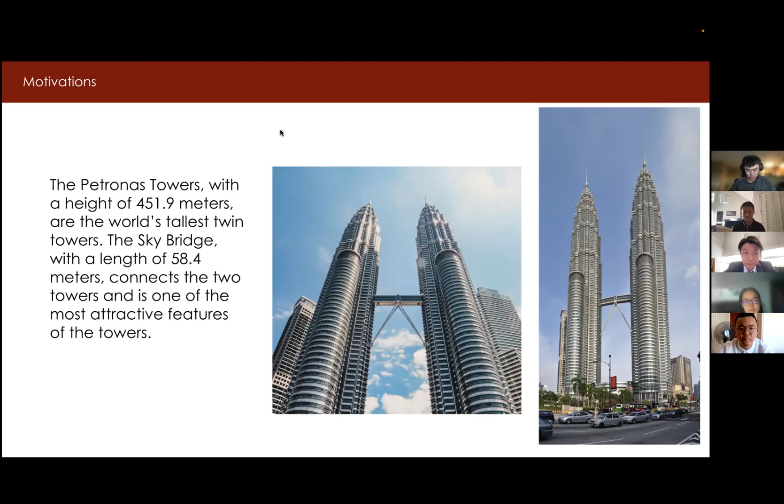Now I'll talk about the objective of our study. The objective of our research is to construct a finite element model to analyze the maximum normalized deformation at different frequencies for the Petronas Twin Towers. We also aim to analyze the building's deformation under pressure with different damping ratios. We use 3 different damping ratios to study the effect of the tower's dampers on the building.

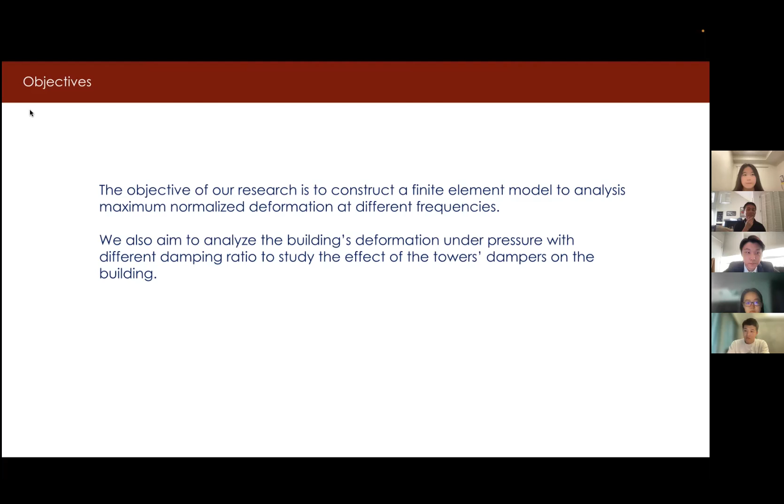Here's more on the background of the building. The Petronas Twin Towers was designed by Cesar Pelli, an Argentine-American architect. The towers were designed to resemble an 8-pointed star that represents unity, harmony, stability, and rationality in Islamic cultures. So this building represents the cultures in Malaysia and has special meaning to Malaysia as a result.

The construction of the Petronas Towers started on March 1st, 1993, and was completed in 1996. They were officially opened on August 31st, 1999, and the 2 towers each have 88 floors. Each tower weighs 300,000 tons, so the total weight is 600,000 tons. The towers were made of high-strength concrete with various strengths up to 80 MPa. The foundation of the towers is a 4.42 meter thick concrete mat, supported on 104 concrete friction piles.

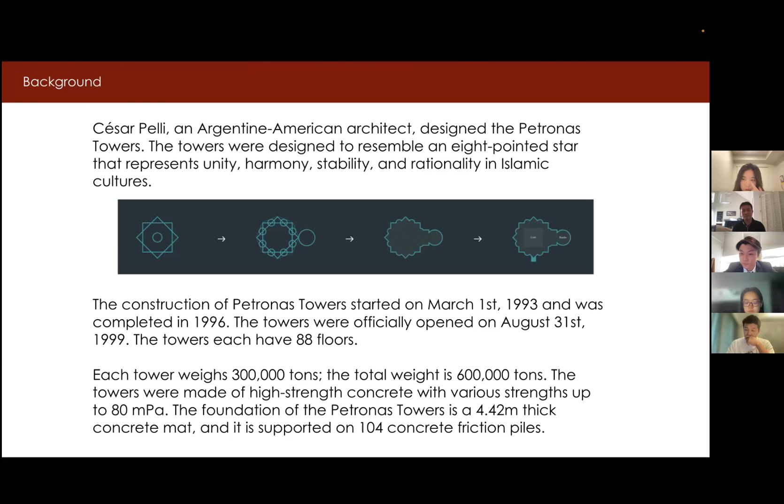One of the features of this building is its sky bridge. The sky bridge is an essential component of the Petronas Twin Towers because it connects them to facilitate movement between the 2 towers. The sky bridge is 58.4 meters long and weighs about 750 tons. It is a double-decked sky bridge, located at levels 41 and 42, about 170 meters above the ground.

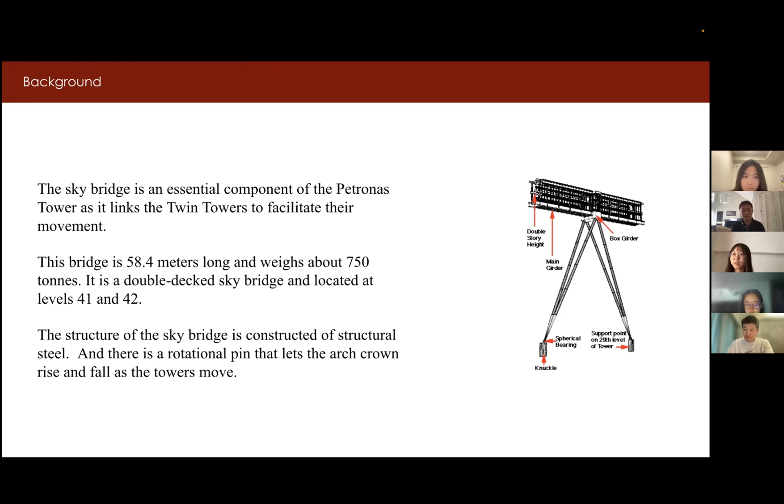The structure of the sky bridge is constructed of structural steel, and there is a rotational pin in the center of the main bridge girder, which lets the arch crown rise and fall when the towers move closer or further apart. Next slide.

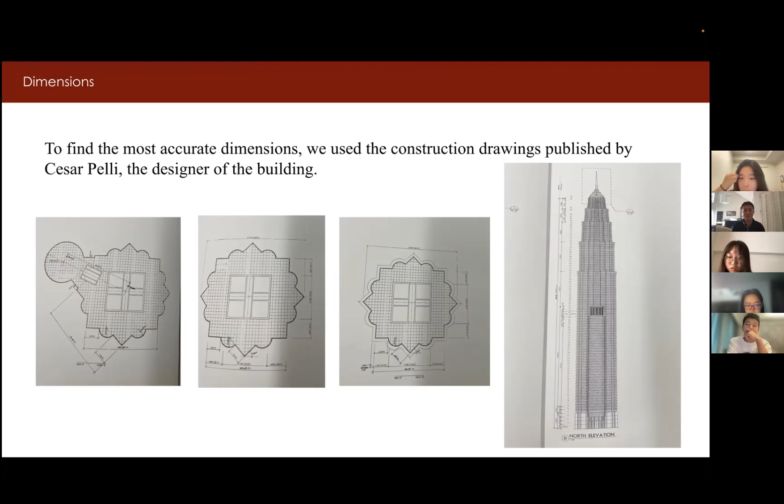Here are the dimensions of the towers. To find the most accurate dimensions, we found the construction drawings published by the designer of the building. Here are some pictures of the different bases of the towers, and on the right is a picture of the entire tower with its height broken into different parts. Next slide, please.

Here are the specific dimensions for floors 1 to 59. The total height is 247.5 meters with a base width of 55.508 meters. For floors 60 to 72, the total height is 53.3 meters with a base width of 51.255 meters. For floors 73 to 81, the total height is 36.9 meters with a base width of 45.608 meters. And the bustle is 24.0 meters in diameter.

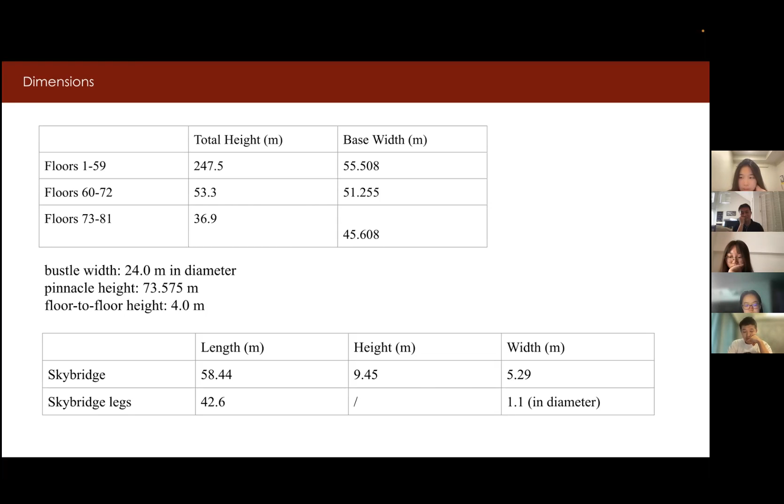The pinnacle has a height of 73.575 meters. Each floor has a height of 4.0 meters. The sky bridge has a span of 58.44 meters with a height of 9.45 meters, about a little more than 2 floors in total, and a width of 5.29 meters. The legs that support the sky bridge are 42.6 meters long and 1.1 meters in diameter. Next slide, please.

Now for the materials of the building, it consists of concrete with various strengths, as shown in the picture on the right. The bottom of the tower consists of concrete strength of 80 MPa, the strongest out of all the concrete used to build this building. From floors 23 up to 60, the columns have a concrete strength of 60. From floors 61 to 84, grade 40 concrete is used to construct the columns.

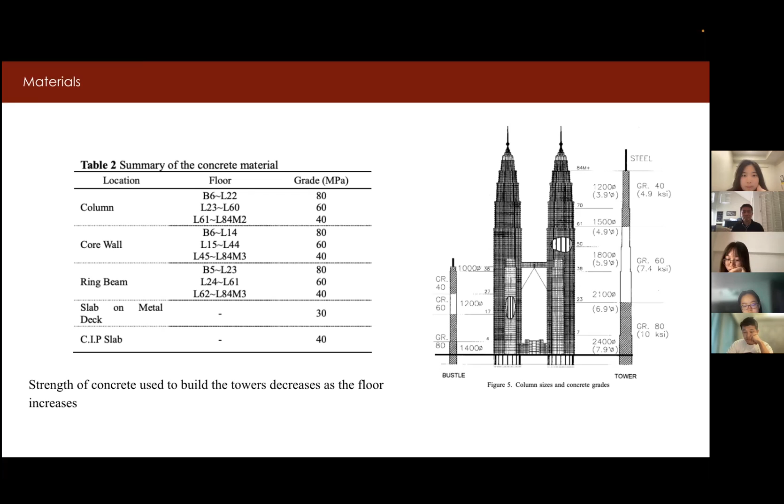For the core of the building, it's grade 80 concrete up to floor 14, then from floors 15 to 44, grade 60 concrete was used, and from floors 45 to 84, grade 40 concrete was used. The foundation of the building was grade 60 concrete as well. Next slide, please.

Now I'll show you our construction of the geometric model. Because the structure of the Petronas Tower is complex, we decided to model it step by step, starting with a simple rough model and gradually advancing to a more accurate and detailed structural model. In total, we modeled three models: the rough model, the hollow model, and the structural model.

We started with a solid rough model, then modeled a hollow model, which as its name suggests has a hollow hole in the center. Finally, we made a structural model of the tower, which only contains the basic bearing structures and the dampers on top of the tower.

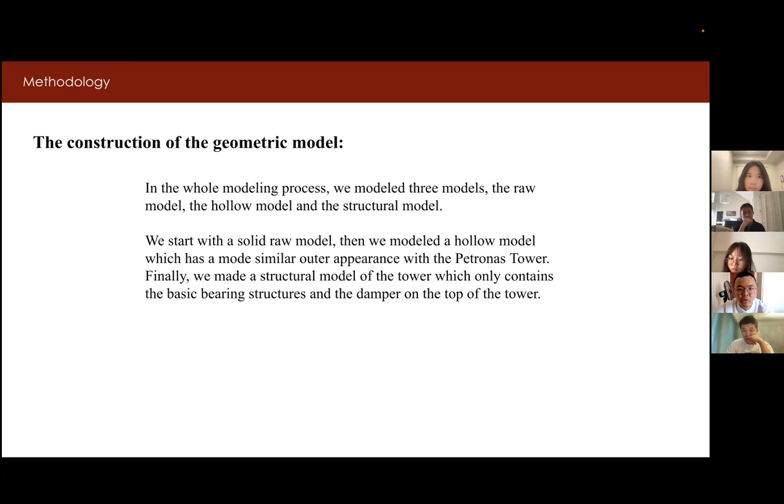Now, here's how we modeled our raw model. We didn't have many precise drawings of the Petronas Tower, so what we did was find a clear image showing the proportion of each part of the tower. We used calculations to get the height and diameter of each part, and then modeled it using these parameters.

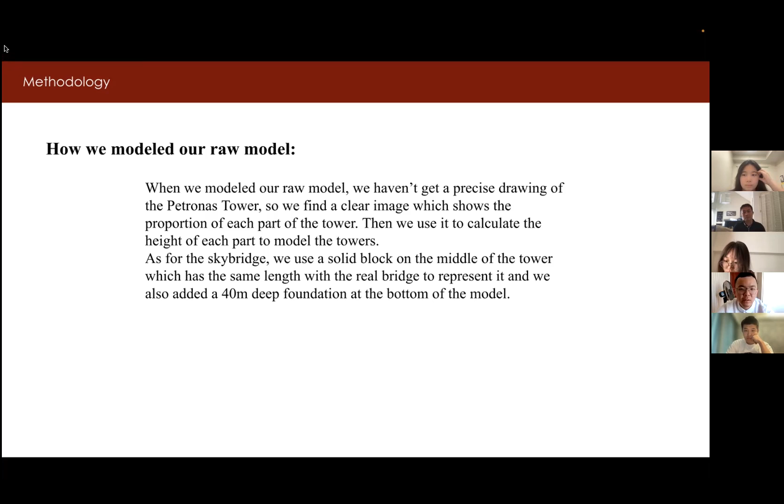For the sky bridge, we used a solid block in the middle of the tower with the same length and height above ground as the real bridge to represent it. We also added a 40-meter deep foundation at the bottom of the model.

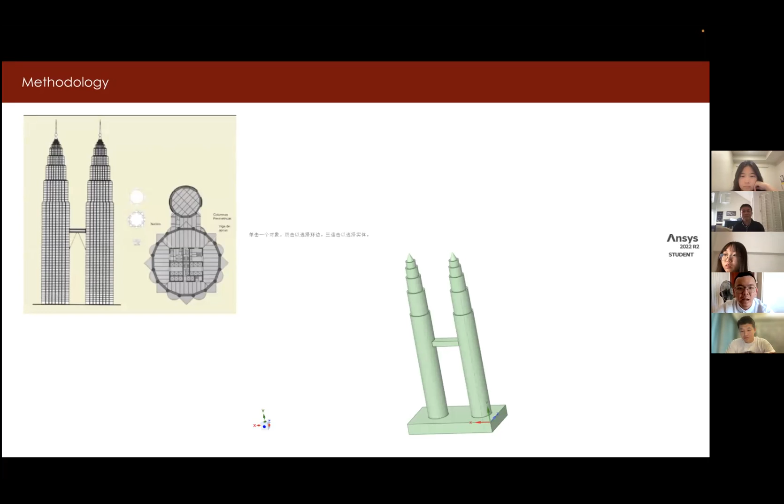Now comes our construction of the hollow model. After making the raw model, we found it wasn't very similar to the real tower, so we decided to improve it. We found drawings showing the parameters of the base and the height of the tower, and modeled the hollow model, which has a similar geometric shape and some similar structural features to the real tower.

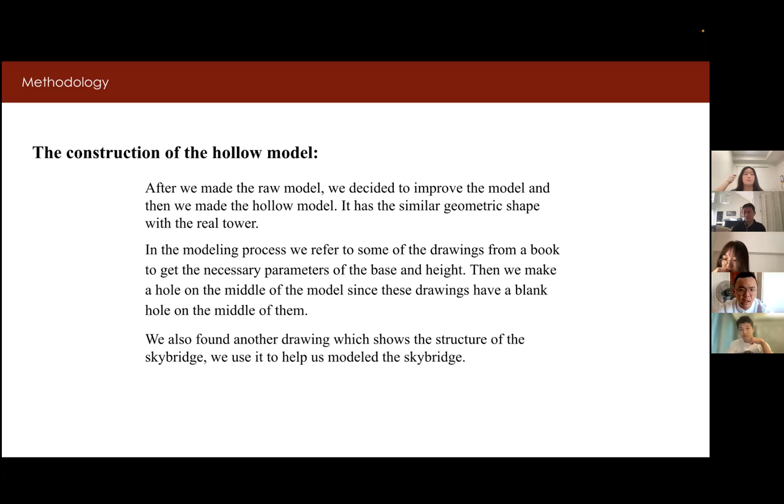We also found other drawings showing the structure of the sky bridge, and used them to help model the sky bridge as well.

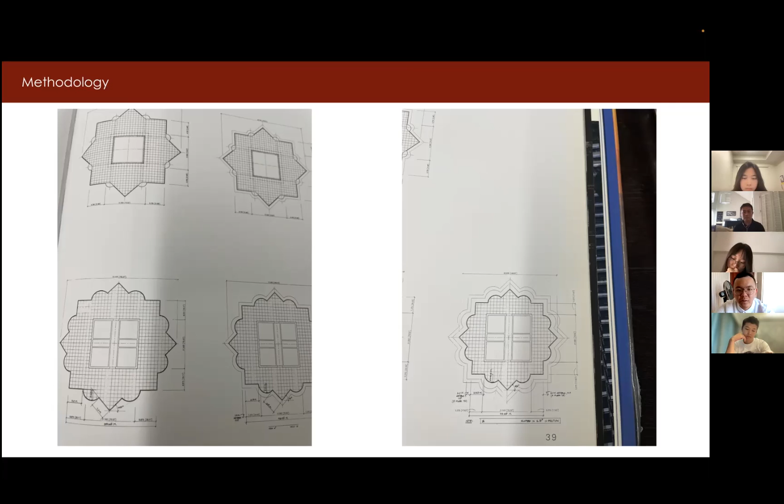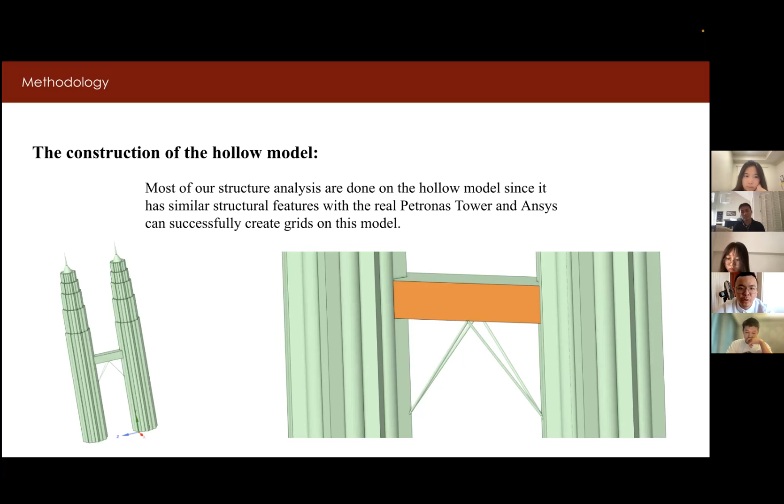Now comes the final part of our model construction, the structural model. After finishing the hollow model, we still felt it lacked some structural features, so we started modeling the structural model with help from our TA Joshua, in order to get the best structural accuracy.

To make this model, we referred to drawings to get the arrangement of the supporting pillars. We also discovered that the hole we modeled in the hollow model is actually a supporting wall in the middle of the tower, so we modeled that in the structural model too.

We also found that different levels actually have different heights, so we set different height values for different levels accordingly.

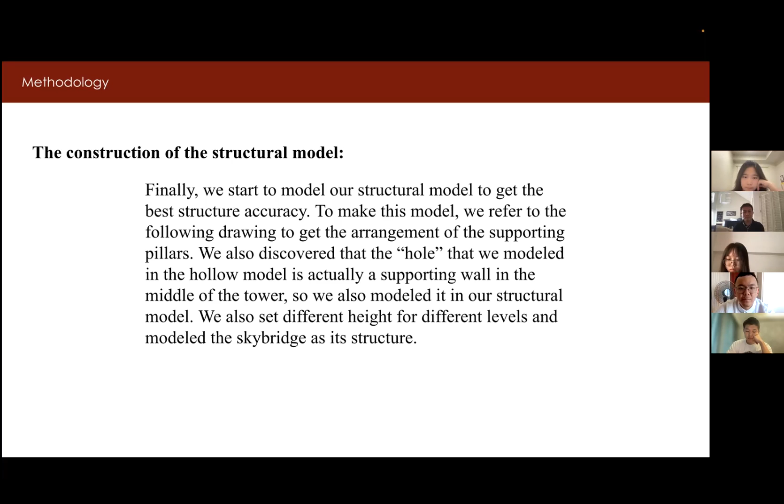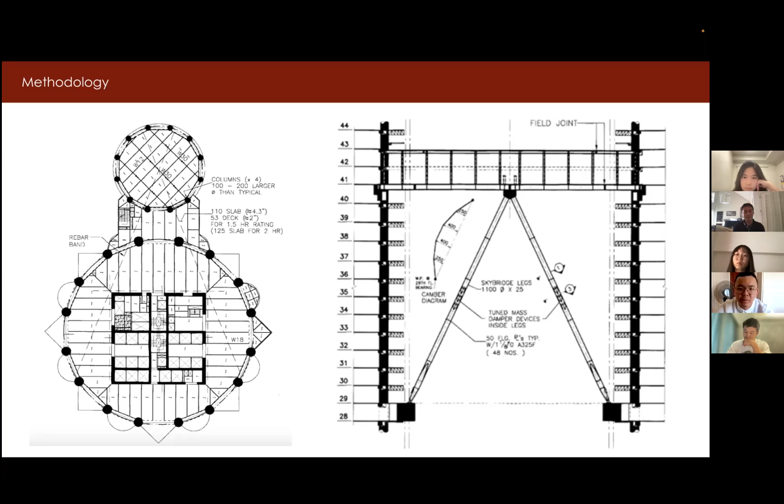Unfortunately, we found that the student version of ANSYS failed to create grids on our structural model. We think it may be because the structural model has too many elements, and the student version of ANSYS failed to separate these elements.

Okay, now I'm going to hand over to Bill for our final part, the results and the conclusions.

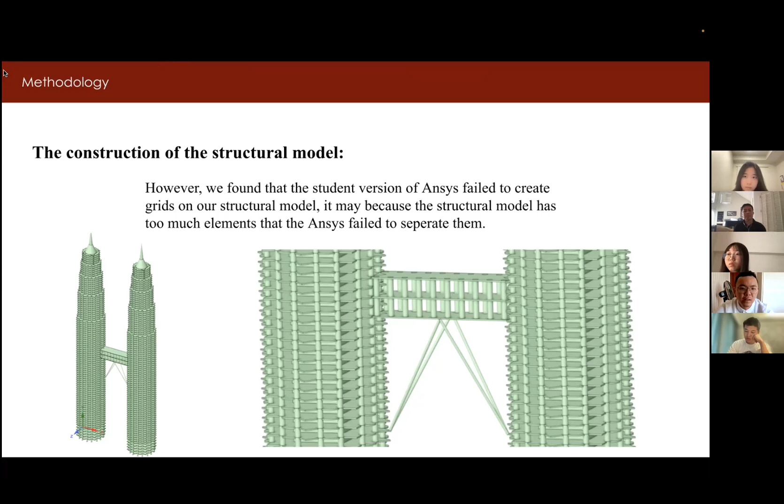Okay, so I'm going to talk about the settings of our ANSYS model. According to the Asia Wind Energy Association, the average wind speed in the Kuala Lumpur area is 1.8 meters per second, and the tower's optimistic design wind speed is 35 meters per second.

Since steel's material characteristics tend to be lighter, it cannot meet the comfort and safety requirements in the area. So eventually the engineers selected reinforced concrete as the main material of the tower, which meets the comfort and design requirements with its large mass and high rigidity. Moreover, it can also damp the tower's sway during strong wind weather and minimize its vibration.

Another reason to use concrete instead of steel is that Malaysia itself doesn't produce structural steel, and importing steel will increase the cost. So therefore, the reinforced concrete structure for the Twin Towers is the most suitable way given the existing conditions.

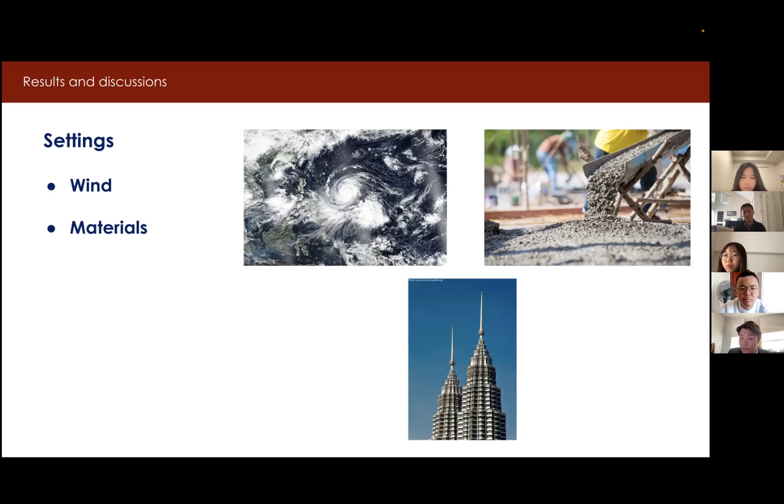On the other hand, Malaysia is not in an earthquake zone, so the tower is mainly designed for wind resistance. So it was designed wider at the bottom and narrower at the top.

At the top of the tower, you can see in the bottom picture, is the damper of the Twin Towers, which can control the counterweight objects to move in the opposite direction through spring and hydraulic devices in strong wind weather or earthquake, thereby reducing the vibration of the building.

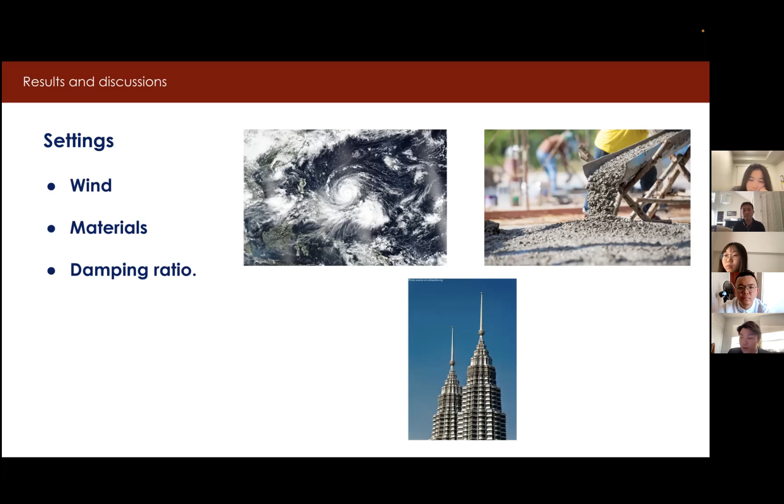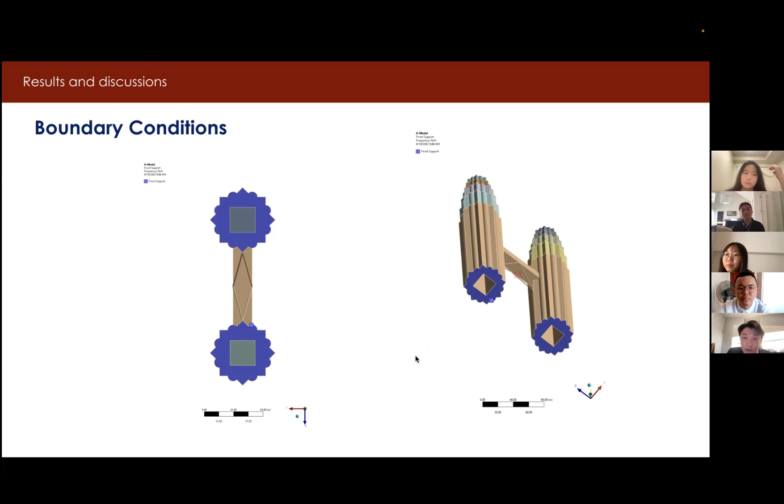So as you can see, there's no major discrepancy in the result. So the mesh independence study shows the result is independent of mesh density. However, in our ANSYS analysis, I just used the one with fewer nodes because it wasn't taking too much time to generate the result.

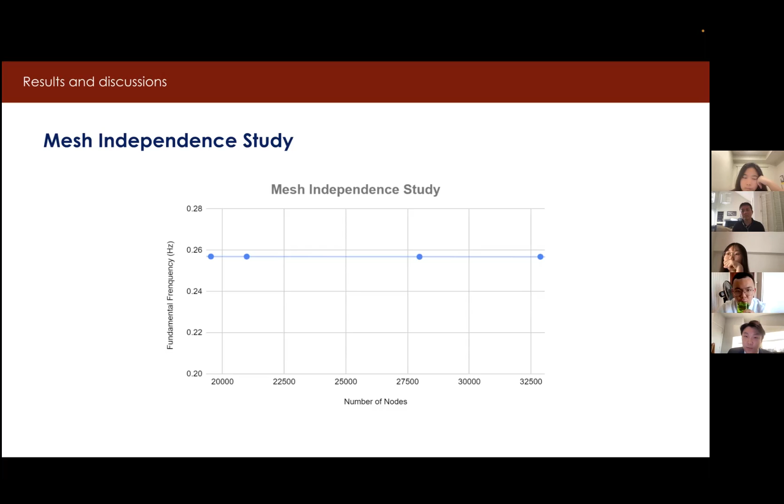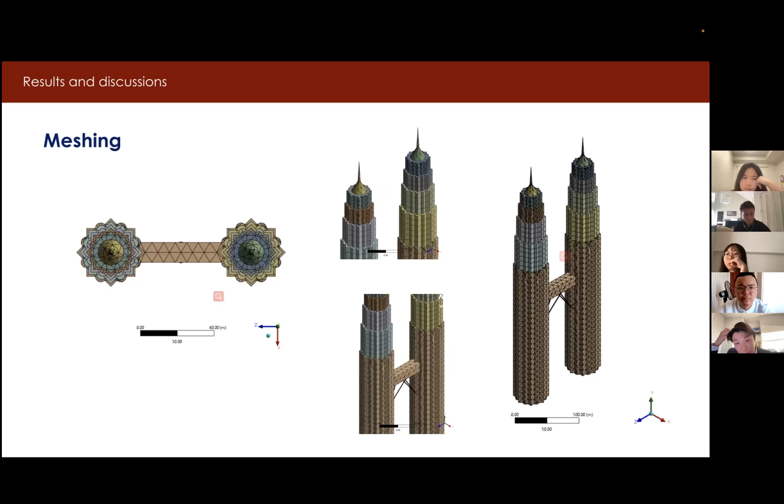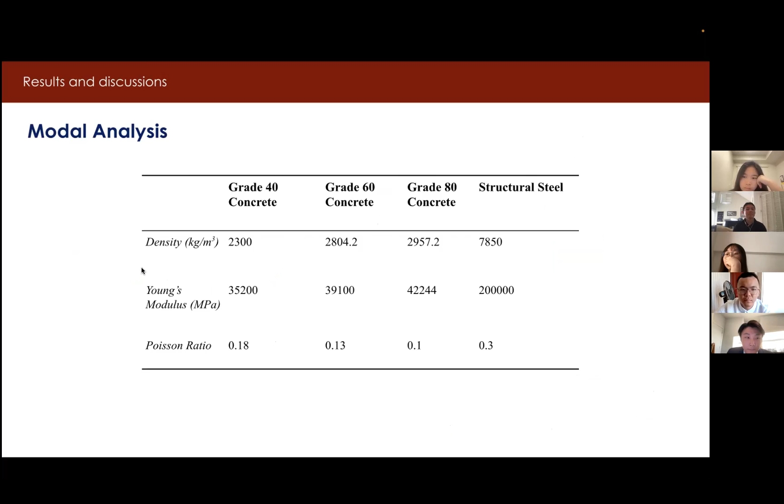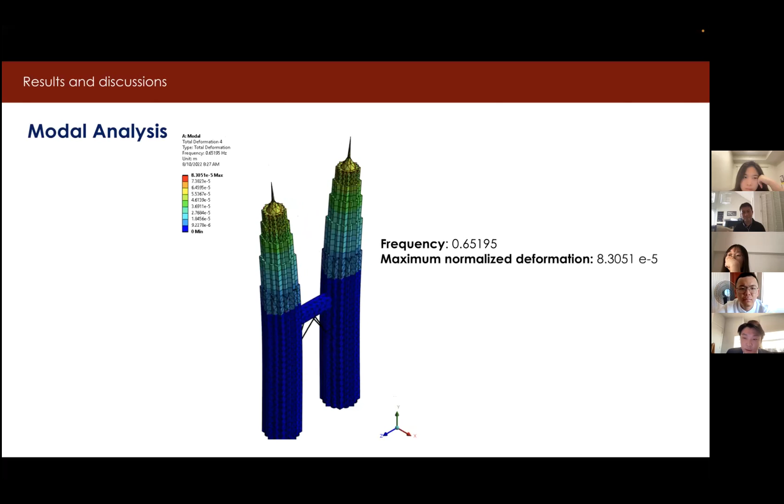And this is at a frequency of 0.65195 hertz. And this is our maximum normalized deformation. This mode is an x-axis non-sway motion.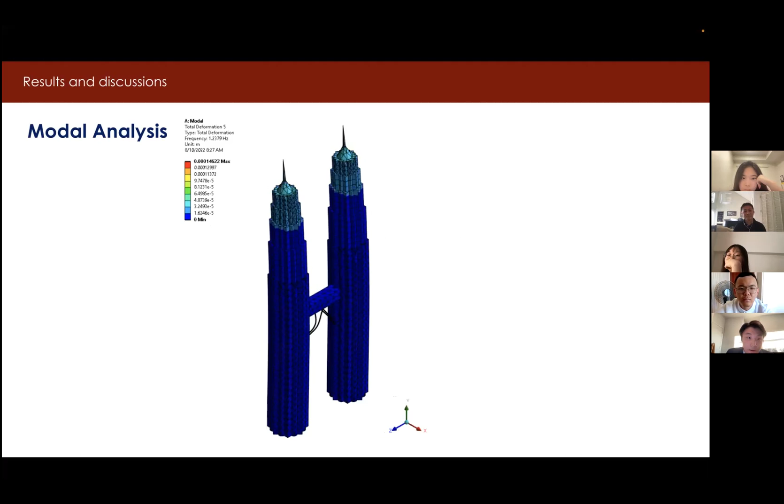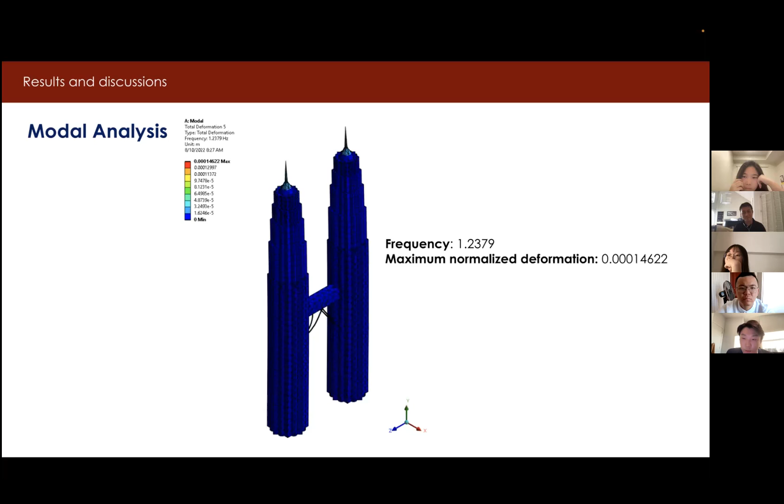And this is mode 5, which is at a frequency of 1.2379 hertz. And the maximum normalized deformation is 0.00014622. And this is a z-axis sway or buckling.

And this is the last mode, which is at a frequency of 1.2442 hertz. And the maximum normalized deformation is 0.00013222 meters. And this is an x-axis sway or buckling.

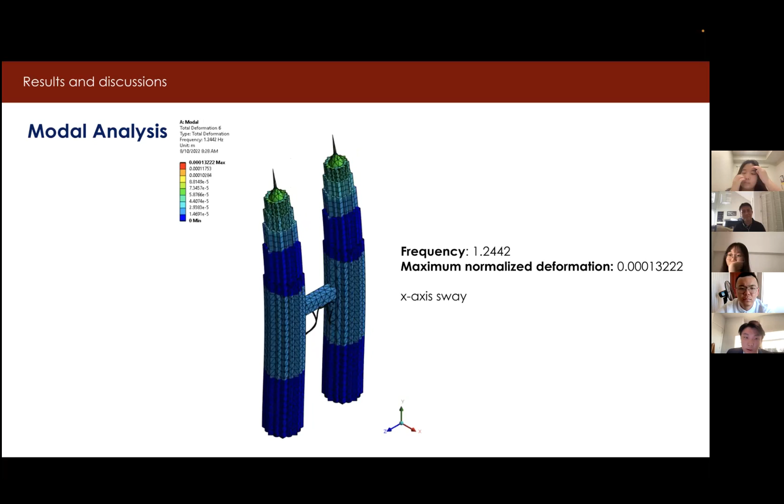And this is our harmonic response.

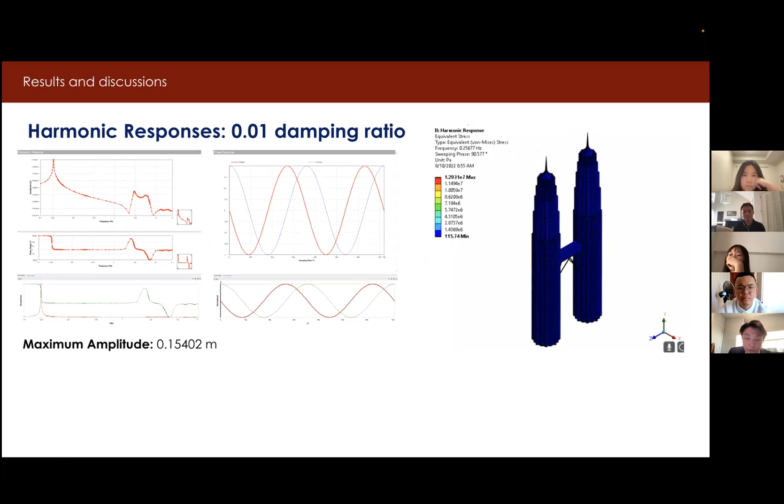And this is the minimum and the maximum pressure applied. As you can see, the maximum is at the bottom of the tower, and the minimum is at the top of the tower. And this is our result for the 0.01 damping ratio. So the maximum amplitude actually decreased a lot, and it is 0.154 meter. And the phase angle is now 90.577. And these are where the minimum and maximum pressure applied is. I think it's pretty much the same place.

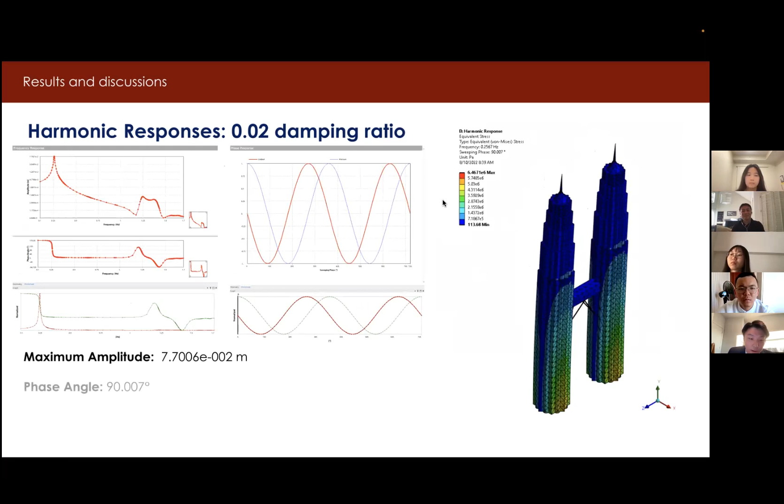And lastly is the 0.02 damping ratio. So the maximum amplitude is decreased a lot. And the phase angle is now 90.007. And these are the maximum and minimum pressure applied on the tower. And these are the 3 damping ratio comparison. As you can see, maybe the animation doesn't play too much, but it is pretty significant. So the damping ratio actually plays a significant role in harmonic responses.

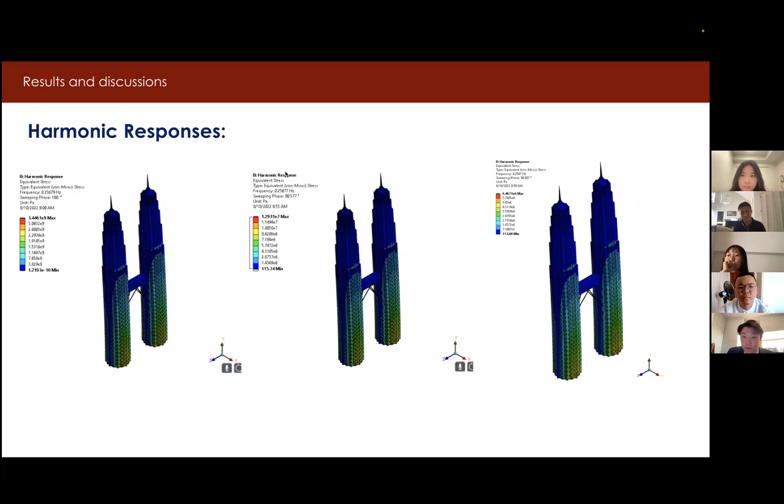And there's nearly like a 200% difference between 0 damping ratio and 0.01 damping ratio. So larger the amplitude, larger the energy. Therefore, dampers are really vital to tower safety and comfort. These are the deformation of the Twin Tower under equivalent stress. So I will hand it over to Christine.

And so in conclusion, we performed modal analysis and harmonic response analysis of the Petronas Twin Towers. For modal analysis, we used 6 different natural frequencies ranging from 0.2568 Hertz to 1.2442 Hertz as presented by Bill. And the maximum normalized deformation and displacement of the towers were analyzed. And the harmonic response analysis at a pressure of 735 Pascal with 3 different damping ratios, 0.0, 0.01, and 0.02, was performed to determine the building's frequency response and phase response. And results of the harmonic response analysis show that the dampers placed at the towers were indeed significant for the safety of the towers. And thank you. That's all for our presentation.

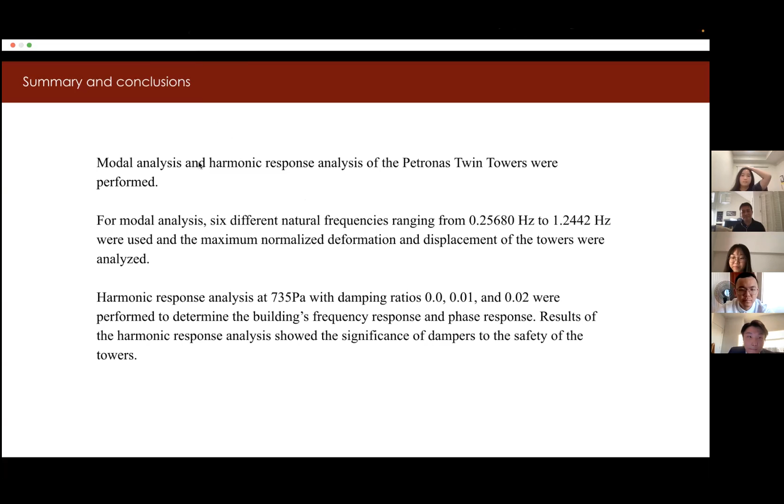Very nice. I was impressed, very impressive. Any questions from the audience?

I didn't realize the bridge has such a profound impact on the response of the twin structures. It created anti-symmetry, right? One tower moving forward, the other tower moving backward. So that is an additional mode of vibration that would not be there if there was no bridge between the towers. In fact, the first mode is forward mode, right? Perpendicular to the bridge. And then the second mode is parallel to the bridge, which is left and right mode. So that is a separate mode of vibration created by the presence of the bridge.

I have a question about the hollow structure. Am I correct that the hollow portion of the structure is rectangular in cross-section? Is that what I saw from your slides? Pardon, Professor, I'm not very clear about what you mean about the hollow structure is rectangular. The hollow portion, the void, the empty portion of the structure inside. Is that what you mean by a hollow structure? Actually, the reason why I named the second model the hollow model is because we have a rectangular hole in the center of the structure. That is what I meant. That the square or rectangular void inside the structure, that is the hollow portion, right?